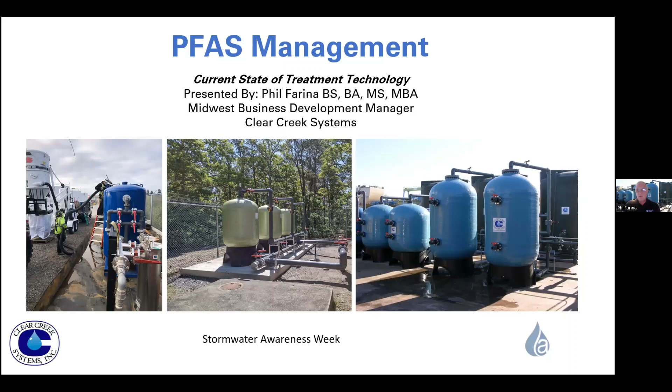What we're going to be talking about today is directed towards more of a primer for PFAS remediation concepts and technologies. We're going to be talking a little bit about the new applications that are in the market, how things are developing, an introduction of Clear Creek. Where do we find PFAS contamination? How should we approach it? What are the methodologies that you on the other side of this screen who are working with PFAS problems should use to approach a solution? What are those solutions? What are some of the current PFAS treatments and technologies? And how does working with a technology-driven company like Clear Creek help you get to where you're going at the end? So we're going to have a lot of information, and I'm going to try to do it as directly and rapidly as possible.

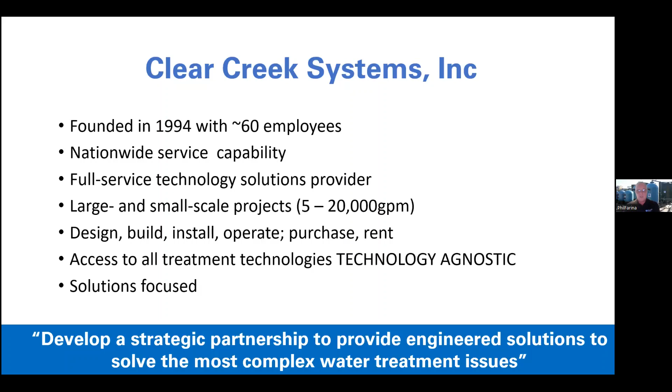Our goal is to develop a strategic partnership to provide engineered solutions to solve the most complex water treatment issues. That is how we focus our day. Some of the markets that we serve are groundwater remediation, construction dewatering, landfill leachate particularly is becoming more and more problematic. There's a lot of bad things in landfill leachate water. All the dredging support, solid separations.

CCR stands for coal combustion residual ponds that are found predominantly at the coal burning power plants. All of these need to be closed. There's a significant amount of water treatment issues associated with that. And of course, our favorite, PFAS remediation.

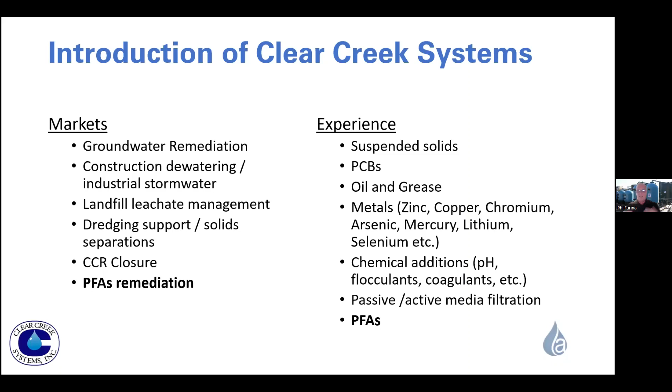Our corporate experience is in suspended solids management, PCBs, oils and greases, all of the metals, various and sundry methodologies of metals removal. We have extensive experience in chemical additions, whether it's for pH, flocculants, coagulants, all of the chemical addition packages. We have all of the passive and active media filters, and we utilize all of this experience in managing the PFAS problem. So that's our commercial discussion.

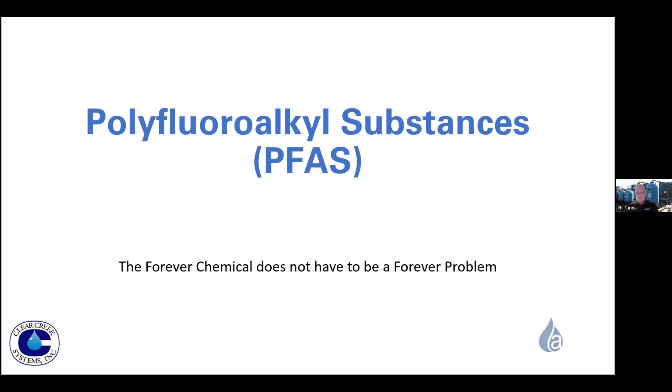Let's talk about polyfluoroalkyl substances, better known as PFAS or PFOA or PFOS, or any one of 6,000 different acronyms that are used for it. We hear and see this sentence all the time. This is the forever chemical. And it is true. PFAS does not break down in the environment. But just because it's the forever chemical doesn't mean it has to be the forever problem. So let's find a way to solve it.

First of all, we need to know where it comes from. You find PFAS basically everywhere. Airports are predominantly one of the more viable contributors to PFAS problems because of the AFFF, aqueous firefighting foam, that was used to protect airports from fires at airplanes. So there's a lot of testing that was done, a lot of training that was done. A significant amount of airports, whether it's commercial, military, private, sprayed a lot of PFAS on the ground and into the environment.

A lot of industrial sites, anybody who was involved in water protection, shoes, clothing, wood, all of them that used a material to prevent something from being contaminated by water, they used a lot of these fluorinated substances. It got into the well waters. It got into the landfills. When you throw something away, you throw a pair of shoes away, waterproof shoes, construction debris. It gets into the landfills, the transfer stations, material recovery facilities, leachate treatment plants, the POTWs, paper. The list goes on and on and on.

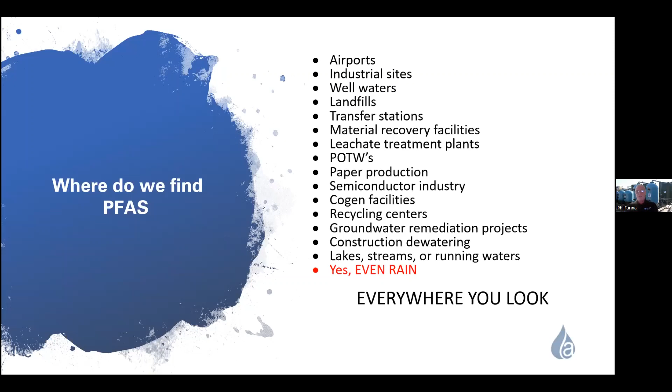But it's even in rain. PFAS is highly water soluble, which is one of the means that it is used in the AFFF. So you can get PFAS in rain. So essentially, everywhere you look, you can potentially find the material.

So what is a holistic approach? A holistic approach is basically the development of what you should do before you do it. And I can tell you that one of the important aspects of understanding PFAS remediation is there's a lot of things you need to do and understand before you make a decision on what treatment application you're going to employ, because all of these aspects of your specific requirement will have a direct bearing on what is the treatment system that you're going to employ. So let's look at this from a holistic approach.

First thing you should do is consider the water source and what you are using it for. Is it groundwater or well water? Is it pond water? Is it a subsurface bloom? Is it a municipal treatment system for drinking water? Is it an industrial waste, landfill, stormwater? All of these applications have a different solution methodology.

What is the water going to be used for? Is it a drinking water application? Is it going to be released through an NPDES permit? Is it going to a river? Is it going to another wastewater treatment system, a POTW? Are you using it for irrigation? Again, this will determine the treatment levels that you may need to apply. Different treatment levels can be accomplished through different technologies.

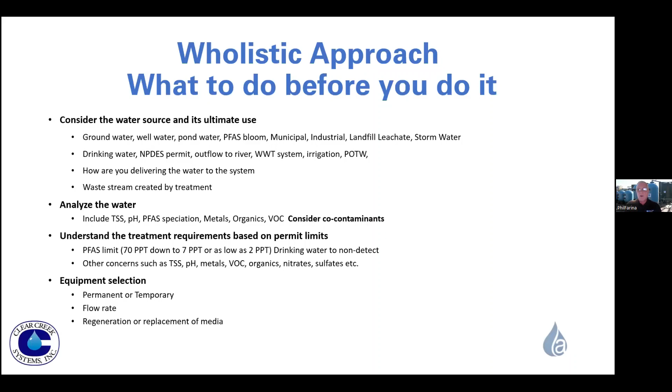So, pre-treatment. One of the most important aspects of any media that's going to be used for PFAS remediation is it's expensive. One of the things that we want to make sure that we're doing is protecting that media. So we should look at the water quality and determine filtration requirements, whether it's bag or cartridge or sand or multimedia. These things are extremely important. Just going directly into a PFAS media could shorten the life of that media, incredibly increasing the cost of your treatment.

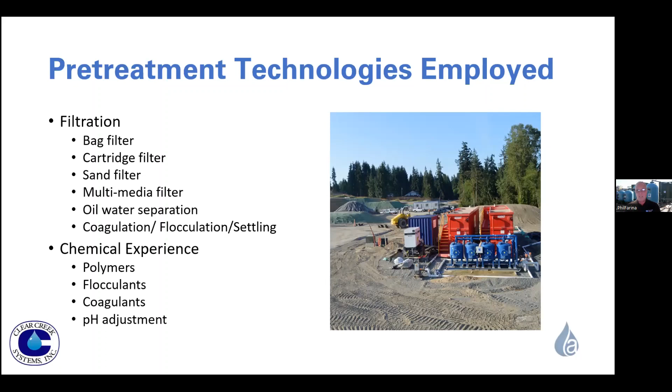Oil, you should look at oil and water separators or other methodologies to remove oil from water, because these have an extremely negative impact on most of the medias. And do we need coagulation, filtration, settling to enhance the filtration process? All of these things will be determined through the water analysis that we just discussed. We have to then look at some of the chemicals that may be employed, polymers, flocculants, coagulants, pH adjustments. All of these need to be considered before we start to do anything.

Then we get into the treatment portion of the media. And we're going to discuss each of these medias in line. There's carbon media, which is GAC, granular activated carbon. We have organoclays, which are naturally occurring substances that have a surface modification that has been designed specifically for PFAS remediation. We have the designer material, the ion exchange resins. These are man-made resins that are designed specifically for PFAS remediation.

And then there are blends. We can blend carbon with organoclay. We can use organoclay in conjunction with ion exchange. These things are very important, but in order to understand which one or ones to use, that analytical becomes critical.

We talked about metals. Metals can be removed from water either through settling, filtration, coagulation, but we also can remove them through ion exchange resins, zero valent iron media, activated alumina, reverse osmosis, and other forms of technology. So again, if you have metals in your water, you can remove those as well. So it is a total process that you need to look at.

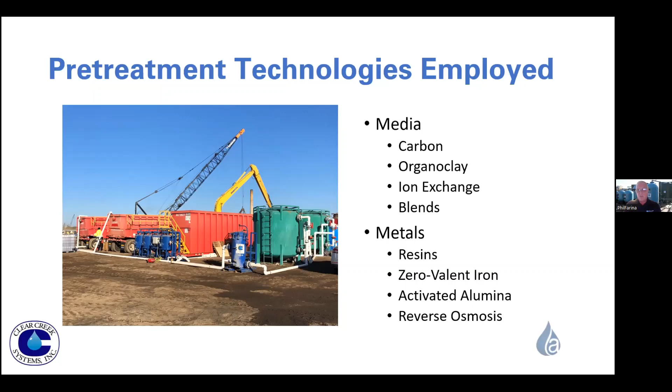Let's get into some of the medias that we talked about. Carbon, also called granular activated carbon. Very well-known material, significant history, lots of data on applications. It is more used for general applications. Now, you can use it for specific applications like drinking water, but you will find during the course of this presentation that it may not be sufficient alone for a drinking water application, but can be used in conjunction with either an organoclay or an ion exchange resin.

You will hear often virgin or reactivated carbon. One of the things to think about, if you reactivate carbon, that's a process that employs heat. When you heat carbon, you change the surface nature of that material as it gives off the PFAS as part of the regeneration process.

This reduces the carbon's ability to work in the future. So reactivated carbon has a life cycle of about 80% of virgin carbon. So when you're looking at a new application that is going to be a long-term application, or an application where you're trying to get to very low levels of PFAS in your treated water, stick with the virgin material.

It likes the mid-range and longer chain molecules. It's not so great on the short chain. It's not so great on the branch chains. So going back to that speciation, by knowing the species that are involved, we can determine which of the medias would be applicable.

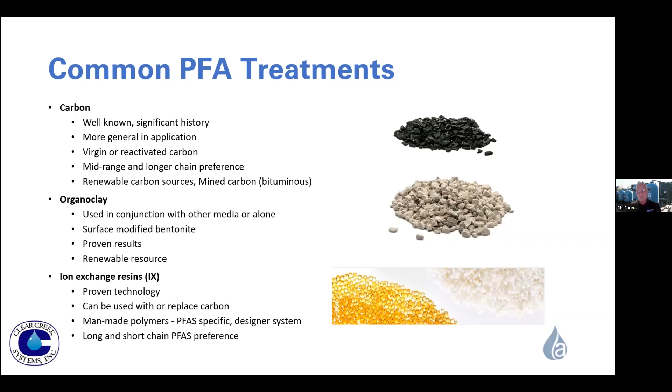Ion exchange resins, this is the newer technology. It is a proven technology that can be used with or in place of carbon. They're man-made polymers specifically designed for specific PFAS. Again, knowing the speciation helps you determine which resins to use. This likes the long and the short chain materials. Again, knowing the speciation helps us determine which materials.

Let's dig into the medias themselves. Carbon. Low cost in general for a pound of material, but because of the amount of material that you may need, because of the size of the equipment necessary, and because of the life expectancy of carbon, it may not be the lowest cost of ownership over the period of your project. If you have a short-term project, certainly carbon would be something that can be used. Much longer-term projects, you have to consider the cost of change-outs and disposal of the media.

Very easy to obtain, multiple packages available, easy disposal either through incineration or landfill, or it can be regenerated. Very, very good for short-term projects, and it has a high flow capability. So you can use it at 500 gallons a minute, 1,000 gallons a minute. It's just that you break it down into different trains.

Some of the negatives, as I said, it exhausts quickly, possible frequent changeouts. We talked about knowing what your target application is. Very difficult to get below 7 ppt on a consistent basis. Getting to that 2 ppt, it's more difficult. It can be easily clogged, which is why you have to protect the resin up front.

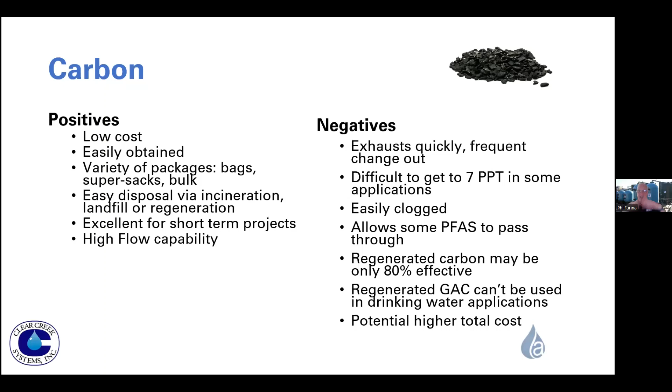It allows some PFAS to pass through. It also gives up some PFAS as it reaches levels where it begins to get exhausted. It will preferentially give up a shorter chain for a medium chain. Regenerated is only 80% as effective. You have to use virgin only in drinking water applications, and total cost of ownership may be higher when you evaluate the total project costs.

Granular activated carbon comes in 2 forms, bituminous or coconut. Bituminous is preferred for PFAS remediation. It is a much higher capacity and a much faster application material. You do require larger vessels because you have to have a 20-minute empty bed contact time. You will always have a lead lag vessel configuration. This is important when you're dealing with limited floor space.

It does remove a lot of the other organics that are in there. So if you have a high organic load in your water, we may use granulated activated carbon focused on the organics and then something else focused on the PFAS, because organics will interfere with PFAS uptake. It has an adsorption methodology so that it has a quick grab, but it also allows some of that to desorb and go back into the stream. Organics will impact the PFAS take-up because they compete with it.

The other parts are preferences are given to the long and mid-range molecules. It does like the branched molecules better than linear. The hydrophobic materials have a much stronger affinity, and it could exhaust quickly.

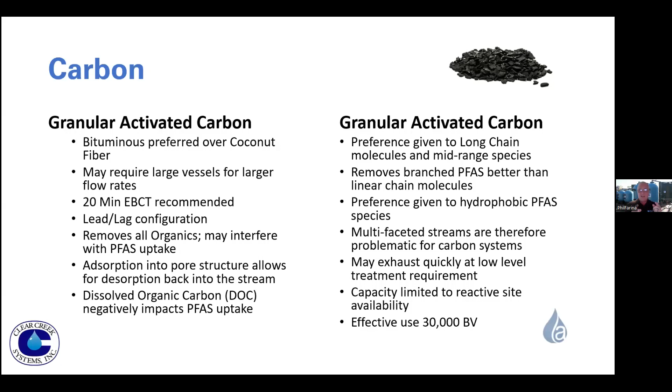One of the things I want you to remember on this slide is that use of 30,000 bed volumes. That's an anticipated concept of the exhaustion level. So after about 30,000 bed volumes, you have to start considering to replace that material. Hold on to that number because we're going to compare that number to organoclay and to resins.

And Phil, we have a question that I think might be appropriate. Someone asked, is incineration an acceptable method for disposing of media that's been impacted with PFAS? With the exception of the Department of Defense, which has recently issued a moratorium on the utilization of incineration, the answer is yes. You can effectively use incineration. There are 4 approved incinerators in the United States that have all of the necessary vapor recovery and all of those things with it. Remember, if we take PFAS out of water, it goes into the media.

We have to deal with that media. There's only 2 options, incineration or landfilling. If we landfill it, there are a number of approved specified landfills for long-term holding of PFAS-laden media. Right now, there isn't a third option. There's no biological treatment. There's no other effective economic methodology.

So landfill right now is the predominant methodology, but depending on your location and your feeling for incineration, with the exception of the DoD, incineration is a viable solution for these medias. Does that answer your question, I hope?

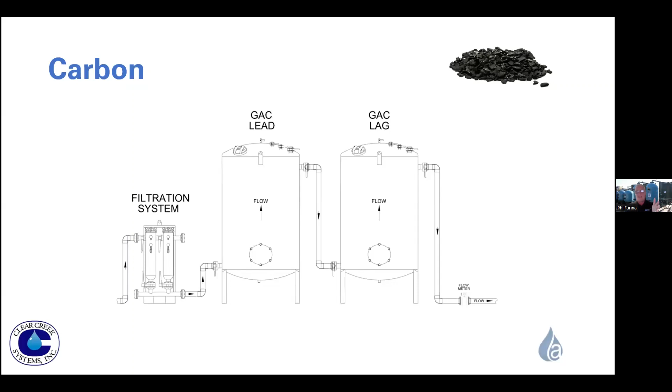This is a typical GAC system. We have our filtration system up front to protect the media, and then a lead lag system of two vessels. Now, organoclays. Organoclays are either a bentonite or a zeolite clay material. Predominantly, the ones that seem to be working better are the bentonite types of materials.

These are naturally occurring, they're mined materials, but as a clay, the surface needs to be modified with a surfactant material to allow the PFAS to come in contact with the clay material and to adsorb or absorb into that clay material. It really likes the PFOA, PFOS, also called AFFF. All of the other fancy ones, the FTCA, the FTSA, all of these different types of sophisticated PFAS materials, organoclays are the way to go.

Long and short chain species, particularly, it does a really nice job on the branched species, and it has a much, much higher working capacity, which means it can pull out a significantly greater amount of material before exhaustion. And we'll talk about that on the next slide. It works in two methodologies, from an ion exchange mechanism and an adsorption mechanism. And you can absolutely reach non-detect levels. Again, in this particular time, non-detect is a level below 2 ppt.

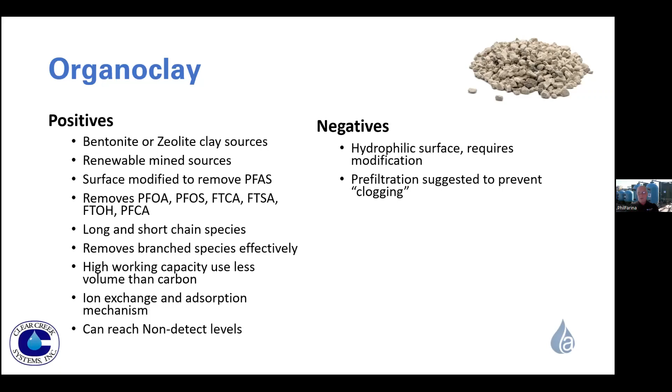Negatives, it is a hydrophilic surface, so it has to be pre-treated. It is now pre-treated by the manufacturers. So it has eliminated all of that pre-treatment that was done on site. So although this is still a negative, it is now moved over to an insignificant. And again, much like all of the other medias, pre-filtration is absolutely necessary to protect the media and keep it from clogging. Recently, organoclays have been approved in drinking water applications.

So we are now seeing a lot of the large municipal treatment facilities are moving towards organoclays and IX resins, and they're moving away from carbon. It can be used in conjunction with carbon. Carbon can be used in front of an organoclay to improve flavor, remove odor, improve taste, take out organics and that area, and then use the organoclay as a polishing step. Depending on the quality of the water, we can also use organoclay alone.

It is a lead lag configuration, so we still need 2 vessels at a minimum, and that obviously is dependent upon the flow volume, which determines the size of the vessels. You can blend it with carbon in the same vessel, so you can reduce your footprint by having an organoclay carbon blend, and that's where we would work with you to determine how that can be done.

If you're doing organoclays, it will pull oils out of the water. So sometimes we see organoclays in front of carbon, but those organoclays are not the same that we would use for PFAS. Those are another class of organoclay that is designed to remove the oils, and we call that a sacrificial organoclay because it's really not working on PFAS. It's really working on pre-treatments to improve the water quality before it gets to the media.

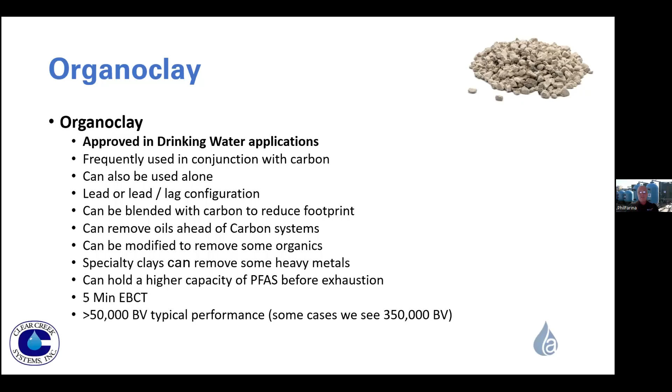A typical organoclay GAC system, we can go with organoclay up front. And what we're showing here is the volume of organoclay that's necessary is smaller. So that's signified by a smaller vessel. And then we can have GAC as a polishing afterward to remove odor, color, taste, etc.

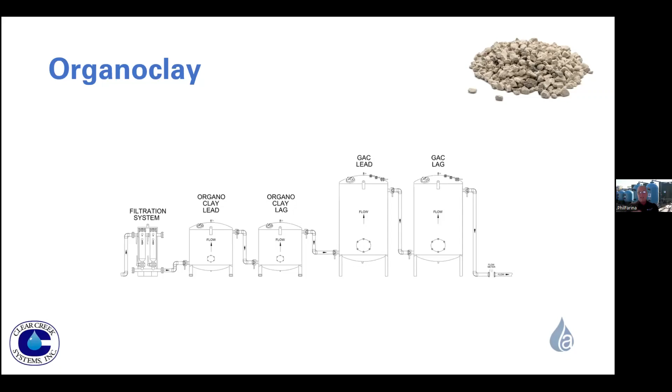Or we can reverse that depending on the quality of the water, where we might be using the GAC up front to take out some of the pre-treatment materials, and then use the organoclay after the GAC as the polishing step. So again, determining what your water quality is determines the media that you're going to use, determines the course of treatment from pre-treatment all the way through media selection and linearity of what media is going to go first.

Ion exchange resins. A lot of companies make ion exchange resins. They are somewhat in short supply, predominantly because very little ion exchange resin is made in the United States, mostly made in Asia, Europe, South America.

So there's a lot of importing of these materials, but they are specifically made for PFAS removal. These surface modified materials can be modified for the specific PFAS that you're looking at. So again, it's important in the early stage to have done that speciation so that we can help choose the right ion exchange material. This works by, as it says, an ion exchange mechanism, but there's also adsorption. The PFAS will go into the resin body itself and be removed both by ion exchange and adsorption mechanisms.

Wide variety of resins available from a wide number of producers. Very, very high holding capacity. This material can hold a significant amount of PFAS before it reaches exhaustion. Easily reach non-detect levels. It's a consistent material for the water treatment applications for drinking water. It is a material that can be counted on to stay at those very, very low levels.

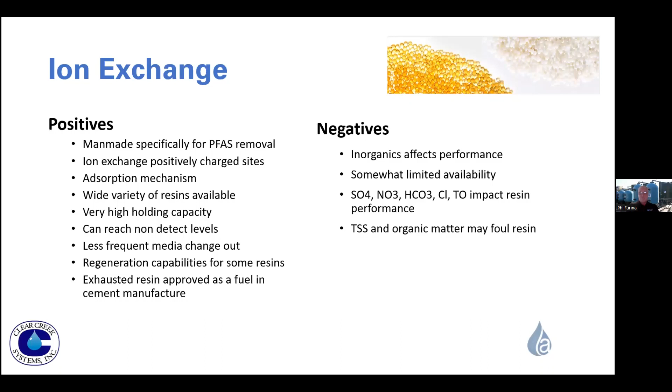We talk about some of the contaminants, SO4, nitrates, sulfates, bicarbonates, HCO3, chlorine. All of these things need to be dealt with because they impact the performance of ion exchange resins. And like every other resin, TSS, organic matter, is going to foul that material. So again, like any other media, you have to remove those materials up front. So that's where pretreatment comes into play.

A little bit deeper, we talked about filtration. You should know the species of the material that you're going to be treating to allow for proper selection of the resins. These resins prefer the sulfonic acids, so the PFOS and longer chain species, but it is excellent for AFFF, which is, again, the predominant species that we see. But well waters and remediation waters, river waters, pond waters, all respond very, very well to ion exchange resins. They do have some affinity for the shorter chains, but they do like the longer and branched chains better.

Two mechanisms, we talked about that before, ion exchange and adsorption. So you have this rapid rate of response. It can be used alone or in conjunction with carbon. Again, as always, the lead lag configuration, very high holding capacity, very quick reaction time. So 20 minutes empty bed contact time for carbon, 5 minutes empty bed contact time for organoclay, 2.5 minutes for resins. This allows us to bring those vessel sizes down substantially.

One of the really great things about resins, depending on the quality of the water and how it is managed, some of these resins may last 1 year to 3 years before you have to change them out. So knowing the speciation up front, knowing the quality of the treatment, knowing the amount of PFAS that's in the water, we can utilize that information in working with the manufacturer to determine the life cycle of that material.

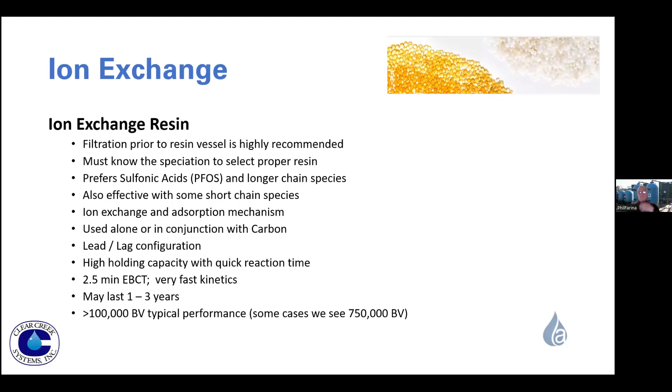We talked about 30,000 bed volumes for carbon, 50,000 bed volumes for organoclay. Here we're looking at 100,000 bed volumes for ion exchange resin. And there are some cases where we've seen as much as 750,000 bed volumes. Very long life cycles of these types of materials.

A typical system might be your pre-filtration system up front. We could use GAC or not use GAC, depending on the quality of the water. But if there's organics or some of these other things in there, we want to protect the resin. And then again, we need a smaller volume of the resin, so that's signified by having the smaller vessels there.

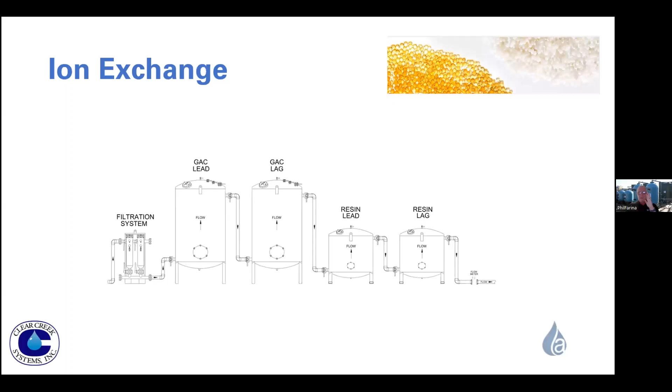So a very linear type of progression for treatment on all of these things. Not a lot of steps, not a lot of things going on, very limited manpower requirements, not a lot of high technology, don't need a great deal of PLCs. So it is a straightforward contact type of system.

Other technologies are up and coming, but have not really reached the level of high-level installations. Nanofiltration can be used in combination with media. It's a point-of-use system in homes. So if you're dealing with a home and you have these under-the-sink filtration systems or whole-house filtration systems, they frequently employ nanofiltration technology.

Up and coming is electrocoagulation. In this case, what we're doing is cleaving the fluorine bond. And when you break that fluorine bond off, you create fluoride. Well, fluoride is the safest form of fluorine. The problem, unfortunately, is that the fluorine-carbon bond is very, very strong. So it takes a significant amount of energy to break that bond. So electrocoagulation processes may require large systems and a lot of energy in order to impact that PFAS molecule.

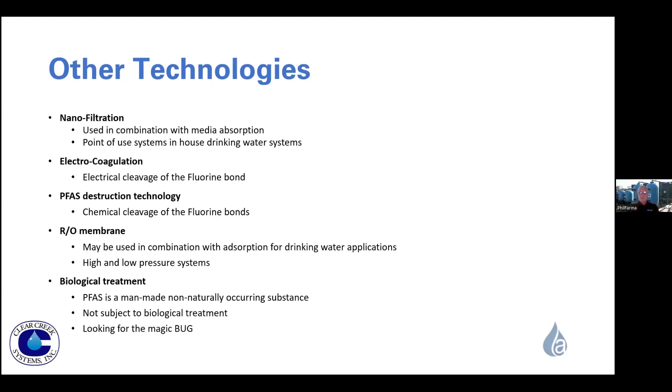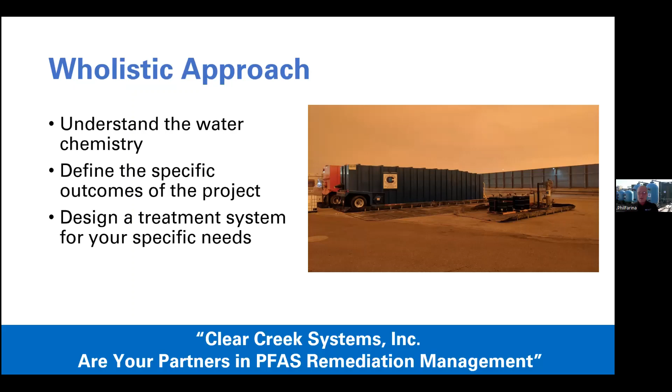Once we work collaboratively on step 1 and step 2, we can then design that specific treatment system, get something that is designed for your flow rate, for your water treatment, for your inbound water, and define that for your final treated outcome water. So in conclusion, Clear Creek Systems wants to be your partner in PFAS remediation management from start to finish. We will walk you through all of the things that you need to do and try to help you understand all of the steps from beginning to end.

So how do we do that? We do that through individually engineered solutions for all PFAS applications. So everything we do is customized, fabricated. They can be self-contained systems. They can be systems like we saw in the picture behind me. They can be permanent. They can be temporary. They can be rented. They can be purchased. Anything that you need to make it happen for your system, we can put that together.

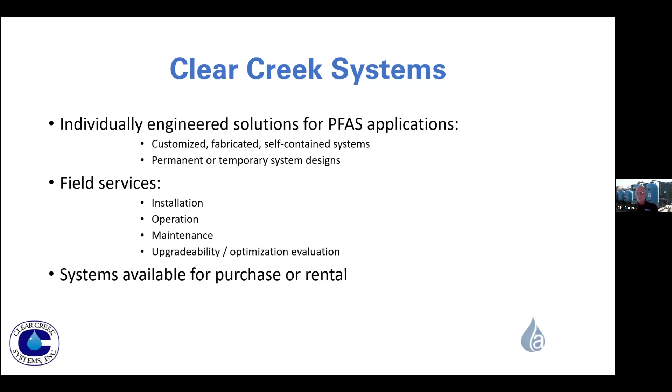We can also supply all of the field services, installation, operations, maintenance, upgradability, optimization, evaluation, all of the steps that are necessary to manage a purchased system or a rental system.